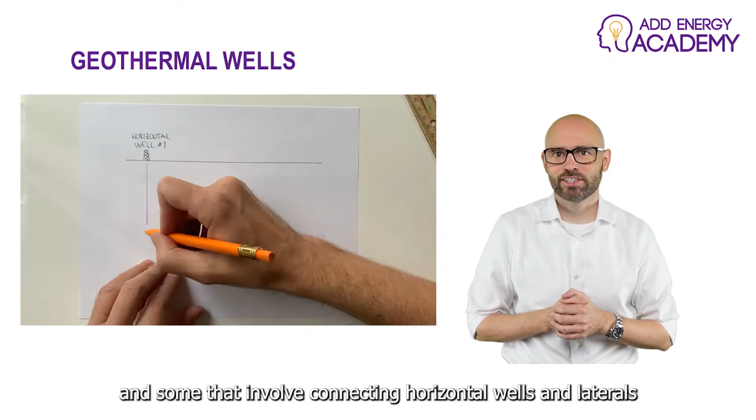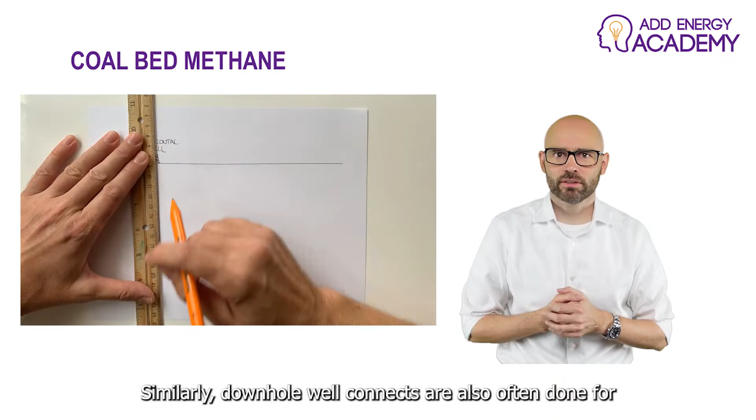There are many different concepts for geothermal wells, and some that involve connecting horizontal wells and laterals to create closed flow loops. Similarly, downhole well connects are also often done for coal bed methane projects, where you will drill one or more drainage wells that intersects a horizontal well with multilaterals.

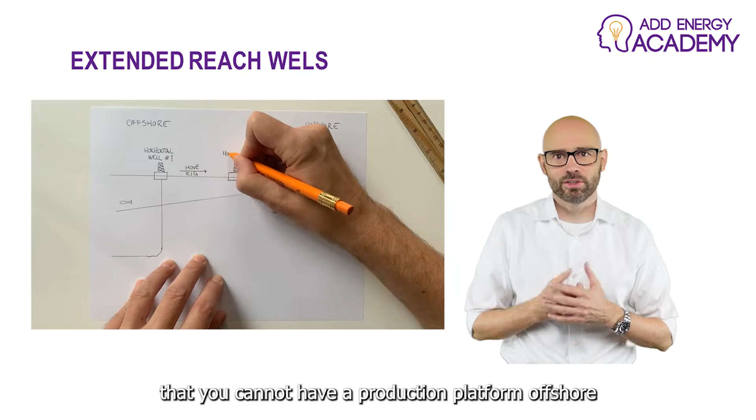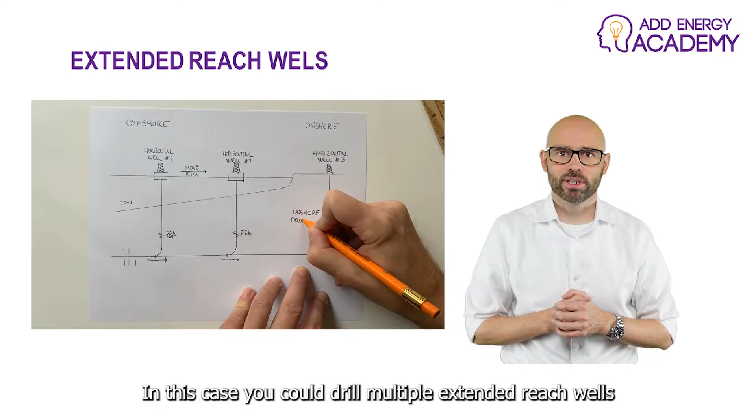If you want to drill an extremely long extended reach well, you may consider daisy chaining wells together. An example could be that you cannot have a production platform offshore because the field is located in the Arctic or by a beautiful beach resort. In this case, you could drill multiple extended reach wells and tie it all back to shore. As an alternative to a pipeline on the ground or seafloor, sometimes wells are connected underground. This includes river and canyon crossings.

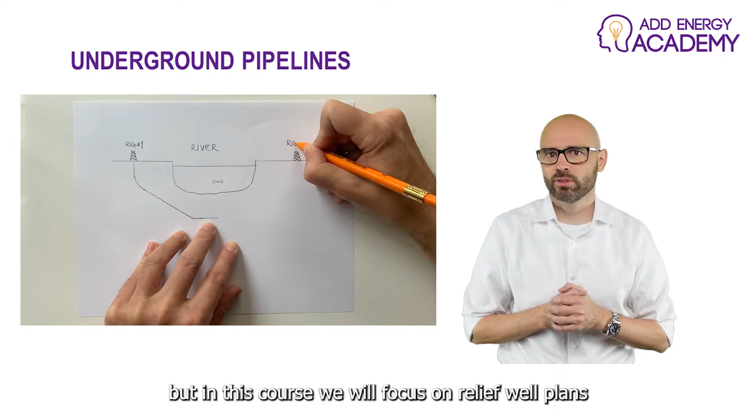There are also other types of well connects, but in this course we will focus on relief well plans where surface access on the target well is not possible and the objective is to control a blowout. If somebody needs a relief well plan, it could mean that a blowout has occurred. In this case, it is recommended to begin planning a relief well immediately, whether it is believed to be necessary or not. Usually, the relief well planning and execution will be done in parallel with a surface or subsea intervention.

More commonly, relief well plans are made for upcoming wells as part of contingency planning and risk management. After the 2/4-14 blowout in 1989, relief well contingency planning became a requirement for planned wells offshore Norway. It has since become a requirement many other places in the world, and a standard practice for many operators. However, there is no universal industry definition for what a relief well contingency plan is or what it should contain.

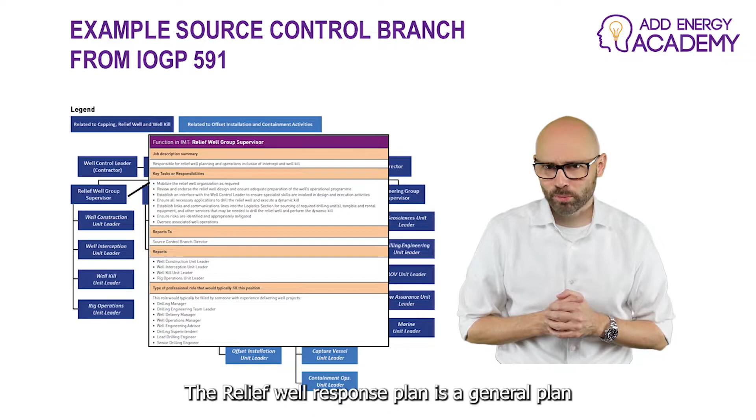Often, the relief well contingency plan is split into two parts, and they are called by different names. In this course, I will call them relief well response plan and relief well feasibility assessment. The relief well response plan is a general plan that every company should have. It may cover a specific region or drilling campaign, but it will be part of the emergency response plan and tied to the incident command system or incident management system.

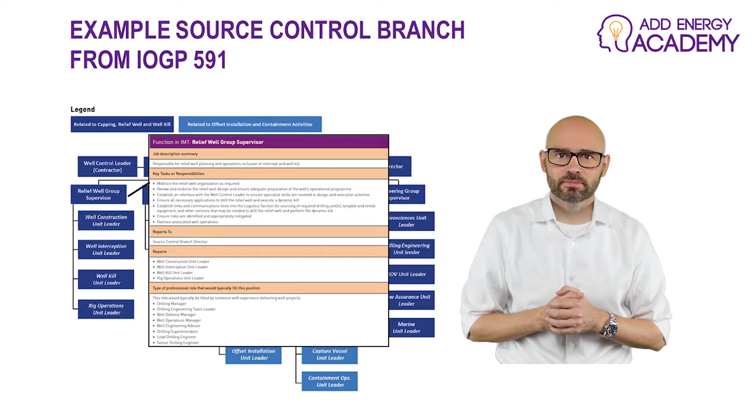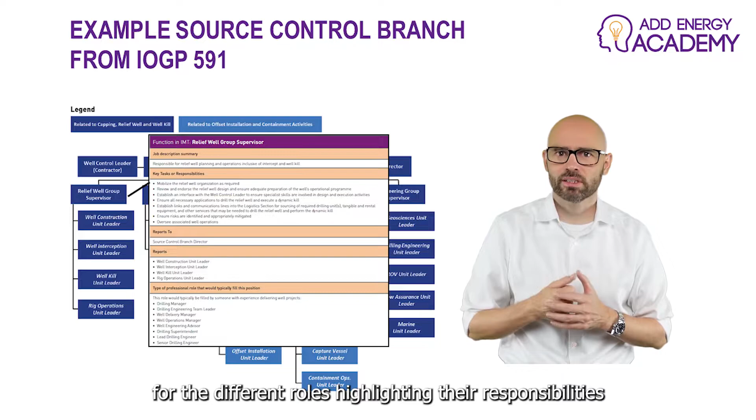Typically, the document will include lists of personnel that will be mobilized when the incident management team is activated and the roles they will take in the event of a blowout. It also often contains a lot of flow charts and tables for the different roles, highlighting their responsibility, the tasks, and processes that need to be completed.

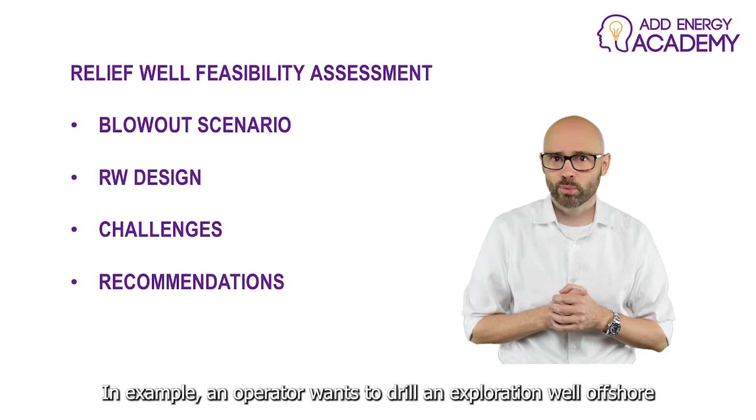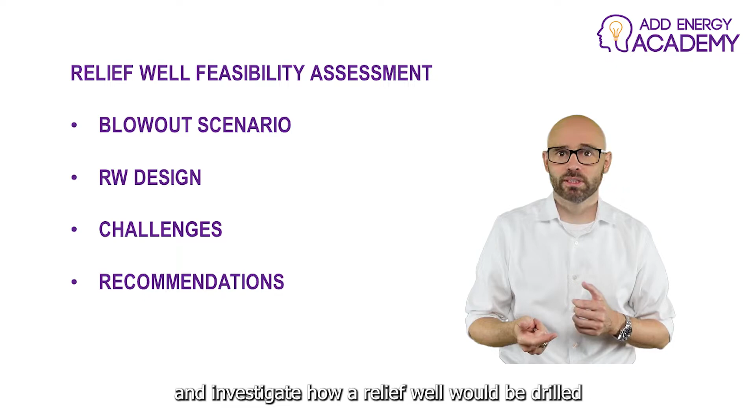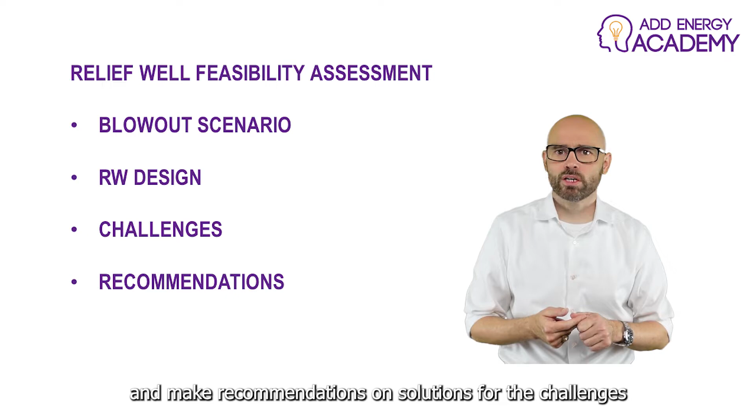Now, a relief well feasibility assessment, on the other hand, is well or site specific. For example, an operator wants to drill an exploration well offshore for the planned reservoir and well design. The assessment will address hypothetical blowout scenarios and investigate how a relief well could be drilled and used to kill the blowout. The report will conclude on the feasibility of the relief well to meet all of its objectives, highlight potential challenges, and make recommendations on solutions for the challenges.

This is what this course will focus on, and from here on out, when I talk about relief well planning, I'm referring to the relief well feasibility assessment.

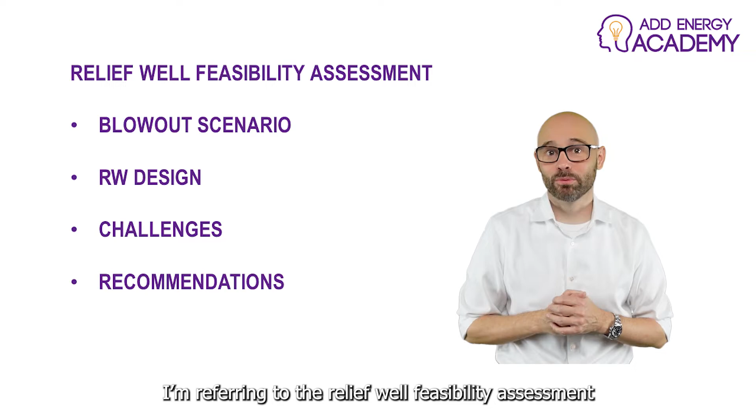Personally, I think the most important question for this part of the course should be, why do we need a relief well contingency plan? There's been many times when I've had to tell my 7-year-old son to put on his seatbelt when we're in the car together, and I've heard from the back of the car that I'm just saying that to be a control freak. Similarly, I've met plenty of engineers who need a relief well plan just because they've been told to get one. I think there are very good reasons for both wearing a seatbelt and having a relief well contingency plan.

Even if the relief well plan will likely never be put to use for an actual event, pre-incident planning will help properly evaluate the risk for an upcoming well. It will familiarize personnel with unusual operations that could become necessary. It may identify current industry gaps and challenges. And if a blowout should occur and a relief well is necessary, then the relief well contingency plan will of course be even more important.

It will minimize the response time since there's already a plan in place. It may reduce poor decisions made by people that will be under a lot of stress. We've also seen that it improves the press releases and limits damage to the public's image. But most importantly, it protects personnel, operators, and industry. This is particularly true after the blowout has been brought under control, which is often followed by litigations and lawsuits.

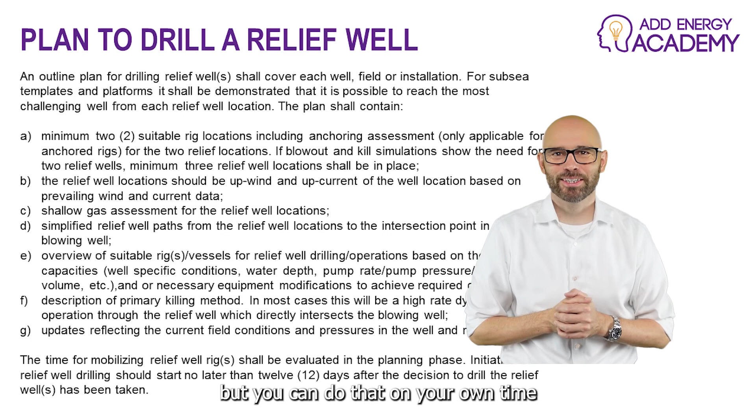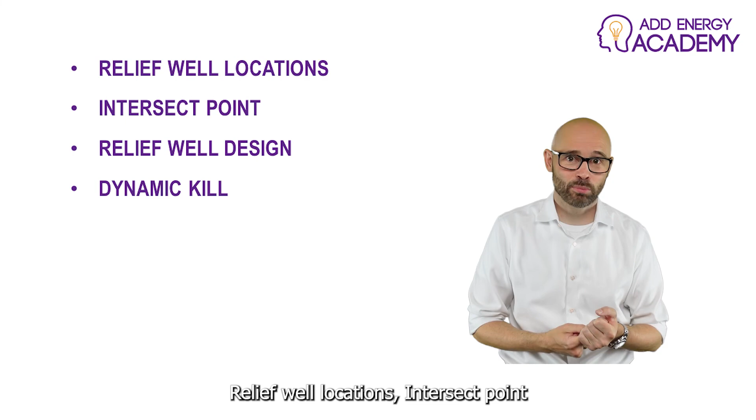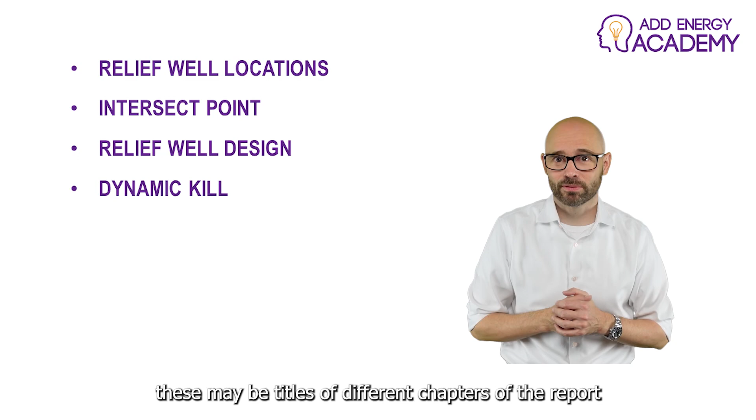In this slide you can see an excerpt from NORSOK D-010 for relief well planning. It is recommended to read through the whole relief well part of NORSOK D-010, but you can do that on your own time. I have tried my best to clean up or summarize the text into concise bullet points: relief well locations, intersect point, relief well design, and dynamic kill. In a relief well contingency plan, these may be titles of different chapters of the report, and going forward we will discuss these topics in more detail.